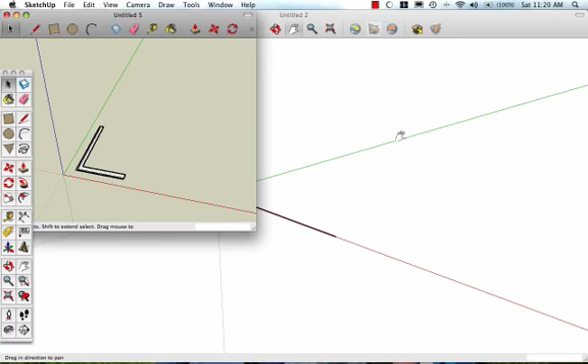Also, if you select New after selecting the woodworking preferences, you can go to New and start a new project. Once you get into the woodworking preferences, you'll notice that all of your files will start with a carpenter's or framing square. That is there so you have scale.

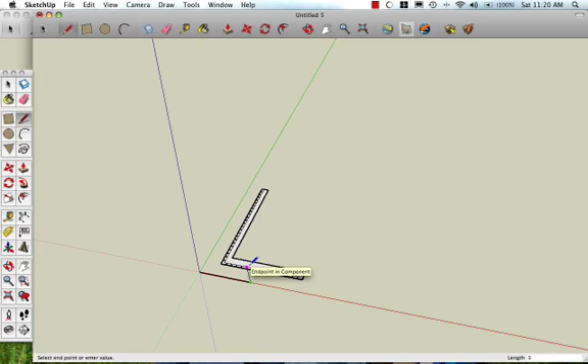In our case here, we'll go again with a 10-inch line, and you can see it's a little bit bigger on the screen to begin with. What we're first going to do here is create a 10-inch by 3-inch board, 10-inch long, 3-inch wide.

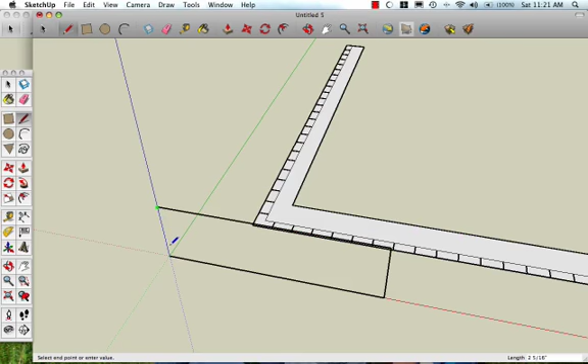To do that, we're going to draw using the axes and all the tools to go 3 inches up, using the red axis to keep it parallel, and then create a 10 by 3 inch surface. In order to make it 3D like in woodworking, we will drag it or extrude it out to 3/4 of an inch. We could also type 3/4 of an inch in order to get it to be a 3/4 inch board.

The next tool we'll be looking at is the tape measure tool. The tape measure tool is a wonderful tool when you want to find areas on the wood surface, such as in order to drill or to mark your board without actually creating a line.

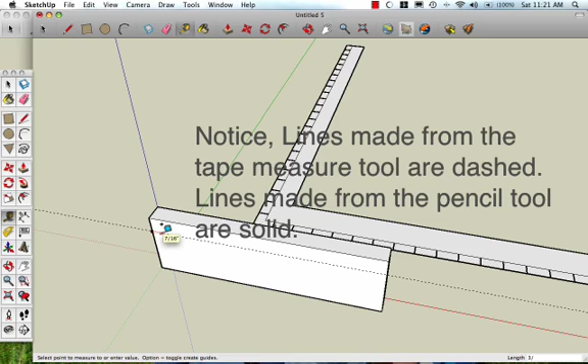In this case, we're going to drag down and type in 3/4 of an inch, finding 3/4 inch off the top edge and off the end of the board, finding 3/8 of an inch. We're marking these out in order to design our plug holes and where those should go. I now have two marks that are both 3/4 inch off the top and bottom edge and 3/8 inch off the end. We can zoom in to see these marks more closely.

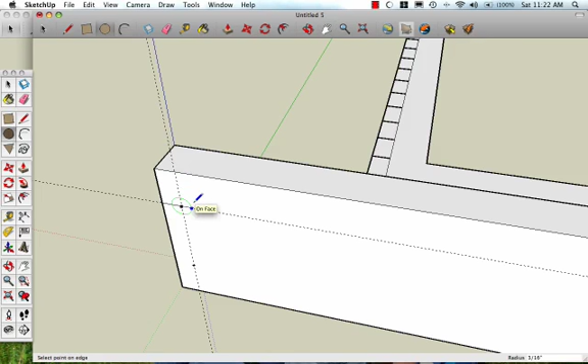Using the circle tool, I can draw circles that are to a specific radius. You can see in the lower right hand corner that I'm drawing holes that have a radius of 3/16 of an inch, or a diameter of 3/8 of an inch.

We can drill down into our board a specific depth as well. In our case, we want to do it halfway through the board, which would be 3/8 of an inch.

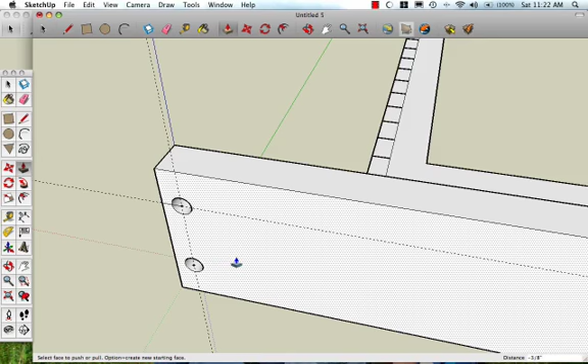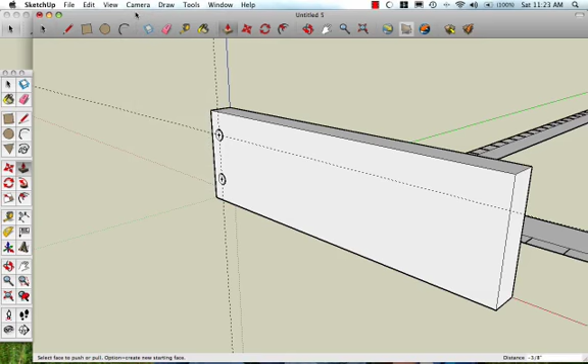A few other tools that will come in handy while you're designing your woodworking project are the camera tools. If you want to hit specific views to see what it looks like, such as an isometric view, or a standard parallel orthographic projection such as a front view, you can do that quickly and easily. Also, you can take off the 3D in order to make it appear more flat, such as a standard engineering or woodworking drawing.

Lastly, I want to show you today where you will be able to dimension your piece. Under the Tools segment, you can find dimensions by looking down. Dimensions are very easy with Google SketchUp. You just click on the line that you'd like, and you can drag it and it will tell you how far or how long it would be. In our case, it's going to tell us in inches because we set that earlier with the woodworking template.

So we have our diameters of 3/8 of an inch, a 10-inch long board, and a 3-inch wide board. We can also use some of the other tools to find things such as how far down our drill holes are, which are 3/4 of an inch.

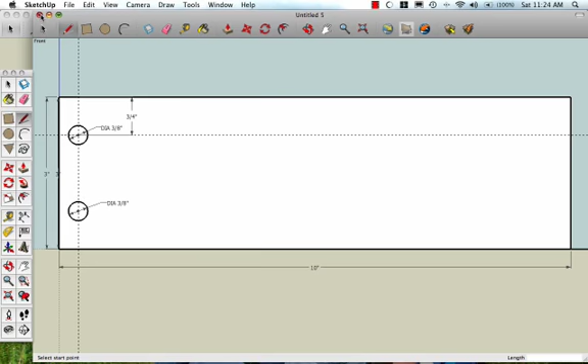These are all the tips I wanted to show you guys today. Again, we learned how to set our template for woodworking and using inches. We learned how to type in dimensions and create lines that are specific dimensions, both by typing them in as well as dragging the lines and watching the length at the bottom right-hand corner of the screen. We saw where the dimensioning tools are as well as the camera tools. These are all tips that you'll need to successfully design your parts in Google SketchUp to create woodworking plans.